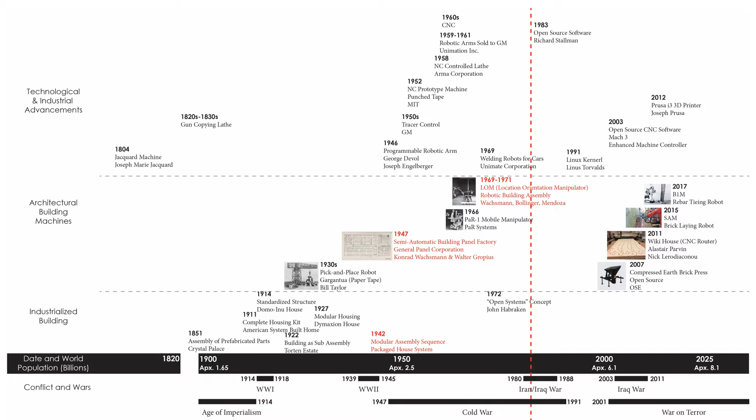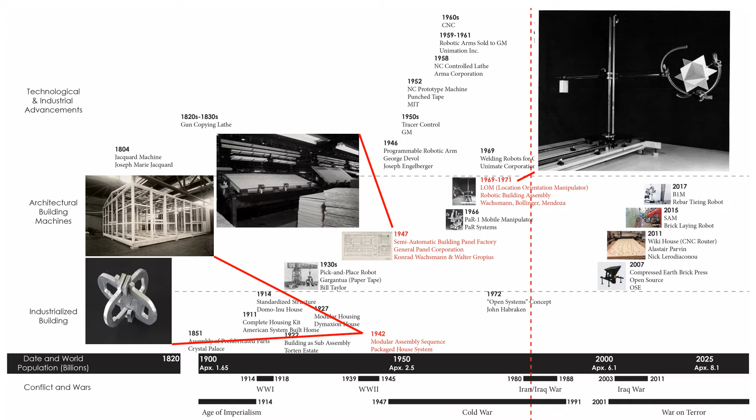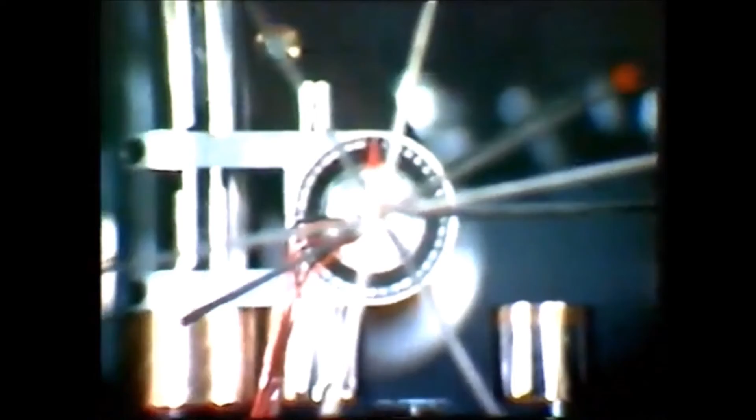Between 1940 and 1960, architect Konrad Wachsmann explored the theoretical concept of an architectural universal through the joint, building system, and fabrication methods. By 1971, his explorations of mechanical building assembly were ahead of his time. This building machine, called the Location Orientation Manipulator, or LOM, was developed by Wachsmann and his PhD students John Bollinger and Xavier Mendoza between 1969 and 1971 at USC.

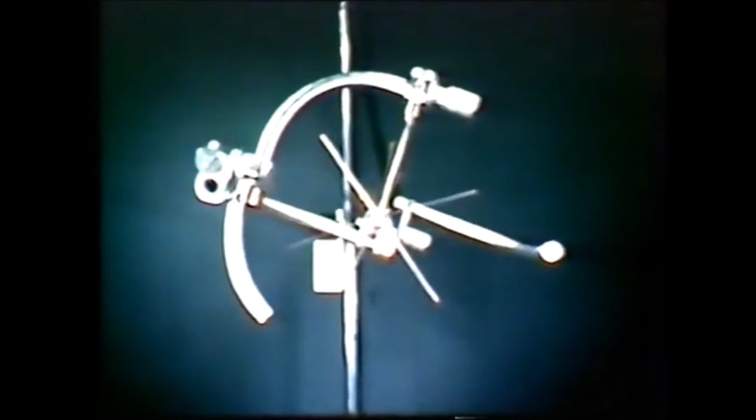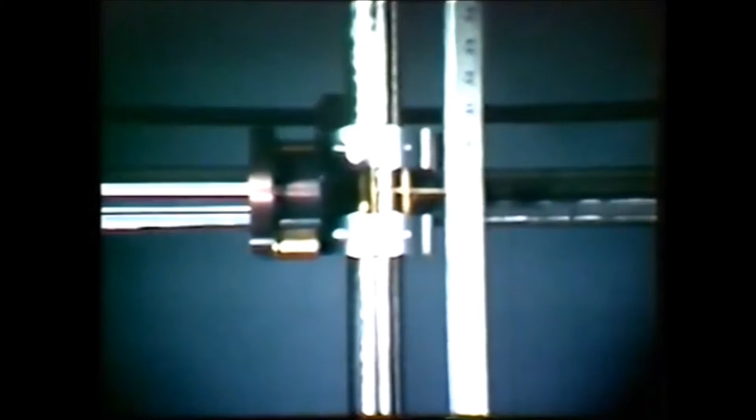This machine was unique from other robotic manipulators at the time because it was developed by architects to study the kinematics of architectural building assembly. At the time, the LOM was built from the most technologically advanced robotic components borrowed from the aerospace and automotive industries. Architecture continues to lack building machines authentic to the practice of architecture.

As a profession, we generally borrow machinery from industrial applications such as shipbuilding, the automotive industry, or the aeronautical industry. Additionally, typical industrial machines are inaccessible to the masses due to cost. Today, we are experiencing an intense need for affordable housing and new building construction that can be adapted for a changing future. By 2025, California alone will need 1.8 million affordable new homes,

and according to the 2015 United Nations Report on Population, by 2030, the world's population will grow to approximately 8.6 billion people. The same report identifies that our current construction rates cannot keep up with this increase in population growth, most of which is occurring in populations of urban poor. We need accessible advancements in architectural building technologies.

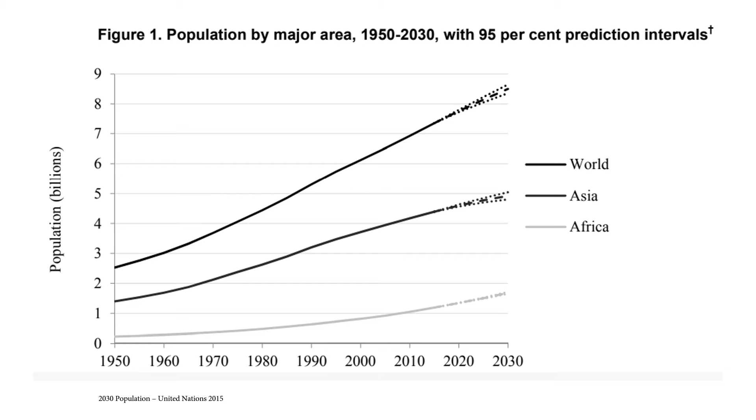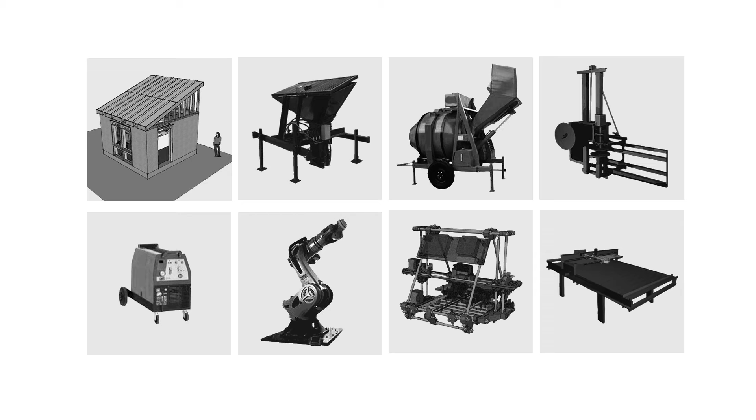Some open source communities, such as Open Source Ecology, led by Marcin Jakubowski, are trying to change that. They are currently developing an open source global village construction set comprised of 50 machines. While open source can help to increase accessibility to advanced construction methods, the machine set they propose includes 8 separate machines related to building processes, 4 of which are exclusive to construction. If accessibility is an issue, shouldn't we be trying to develop one machine capable of many building processes?

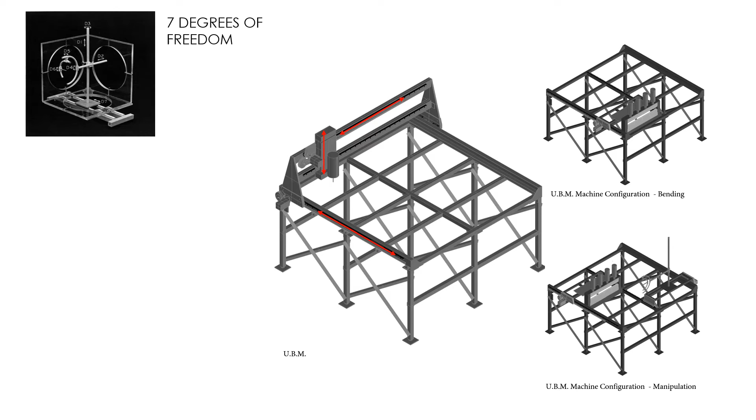This research project employs a singular self-built 3-axis gantry-based machine as a base for modification and testing of processes toward the development and definition of a universal building machine, or UBM. This machine is derived from the research of the LOM: 7 degrees of freedom, 20-inch sphere of motion, and ability to participate in simulations of building assembly.

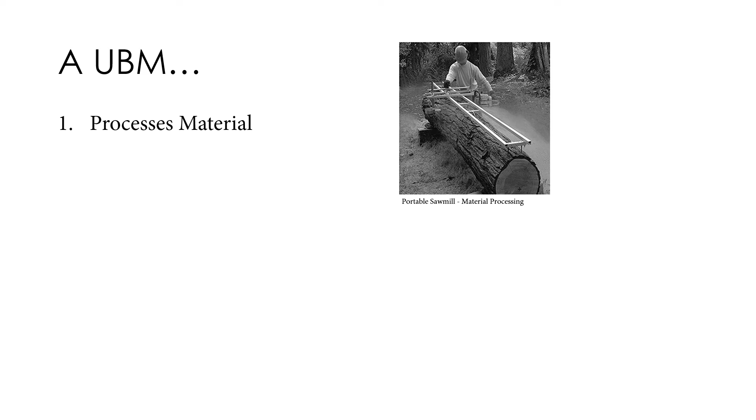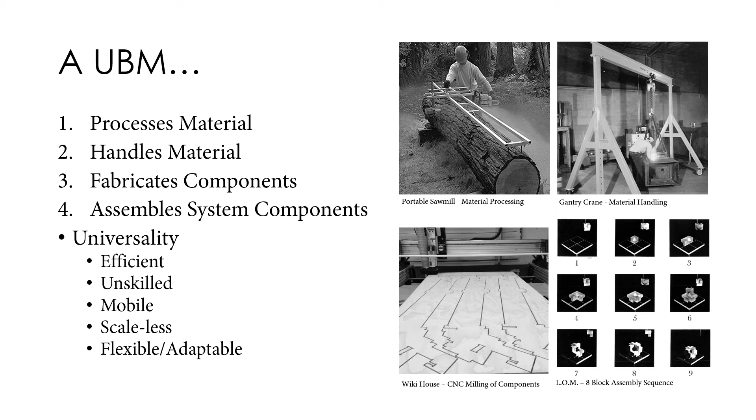As prefigured and defined by the work of Konrad Wachsmann, a UBM processes material, handles material, fabricates components, and assembles system components. In addition, further universality defines it as efficient, unskilled, mobile, scaleless, and flexible and adaptable. This methodology is described here, where the UBM will be used to create building components. These components will be evaluated in the context of a building system, and then this analysis will be used to modify and improve the machine.

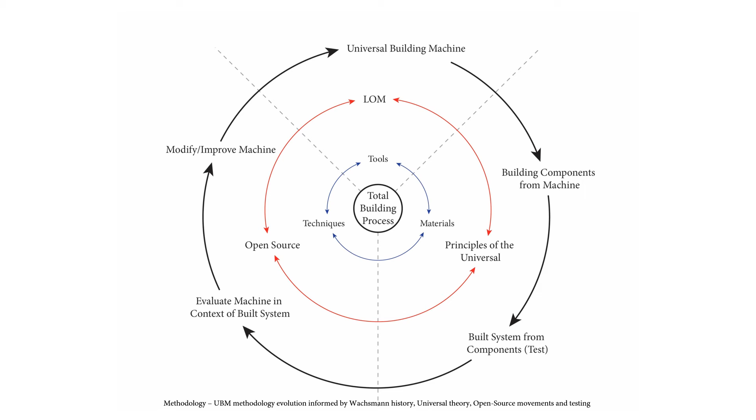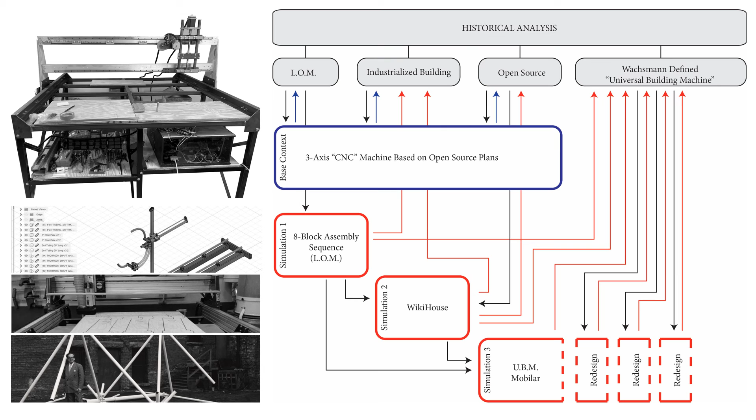The entire time, this universal building machine will be informed by the LOM produced by Wachsmann, principles of the universal, and open source method of design, fabrication, and distribution. A series of 3 physical simulations create a dialogue between the theoretical UBM derived from Wachsmann's work and the physical manifestation of the contemporary UBM, which is no longer bound by proprietary industrial knowledge and which contributes to the open source community in an attempt to extend architecture's reach through building construction.

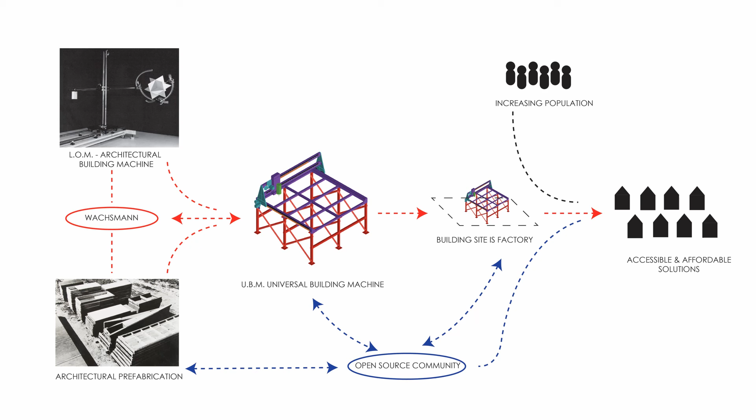A UBM derived from architectural building and informed by the efficiency and durability of prefabricated systems would facilitate the on-site building construction process, effectively transforming the building site into a full production facility to meet a growing global demand for affordable housing. Furthermore, the UBM is designed for the open source community and ease of replication to allow for a greater accessibility to precise and efficient fabrication methods. One machine becomes accessible, affordable, and deployable.

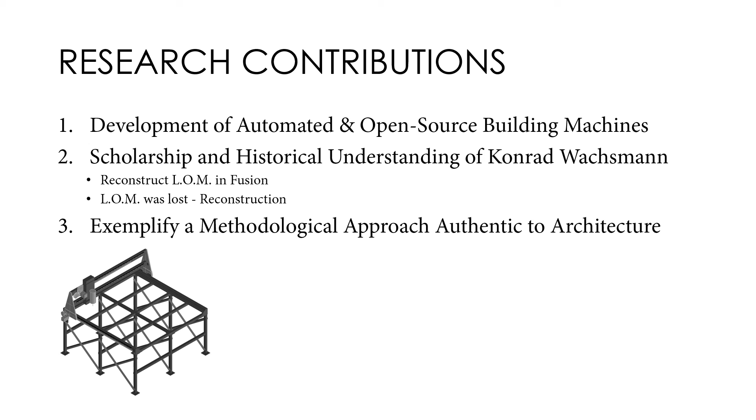It is expected that this research project will make contributions to the development of automated and open source building machines in architecture, the scholarship and historical understanding of Konrad Wachsmann through digital and potential physical reconstruction of the lost LOM, and offer an example of a methodological approach authentic to architecture that engages scholarship in a dialogue with making.